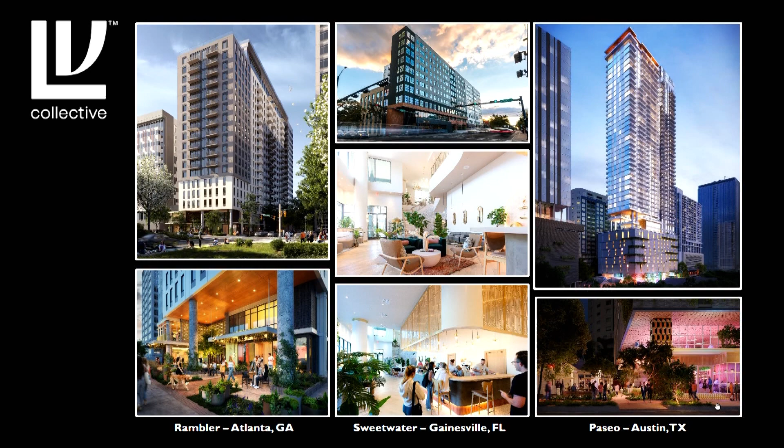Again, some more pictures of the type of architecture we do and type of structure, just to give you a sense of what LV has done in terms of design.

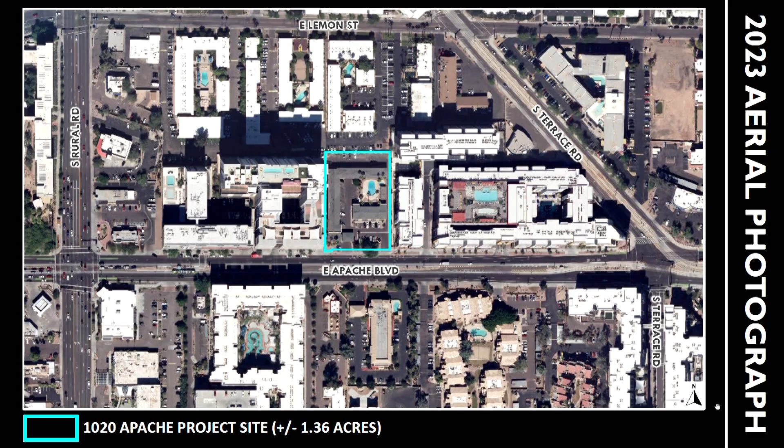The site itself, everybody knows, is on the north side of Apache, it's 1020. It's between two student housing developments already - one used to be called the Rise, now Carbon, and the other is the Apollo. Currently it's a Super 8 motel, as you'll see here, with surrounding uses.

Our request is to do a zoning map amendment to rezone from commercial shopping and service CSS and TOD to MU4 TOD, which matches the adjacent areas around Apache, to do a PAD to establish site-specific development standards, and then design review for the building site.

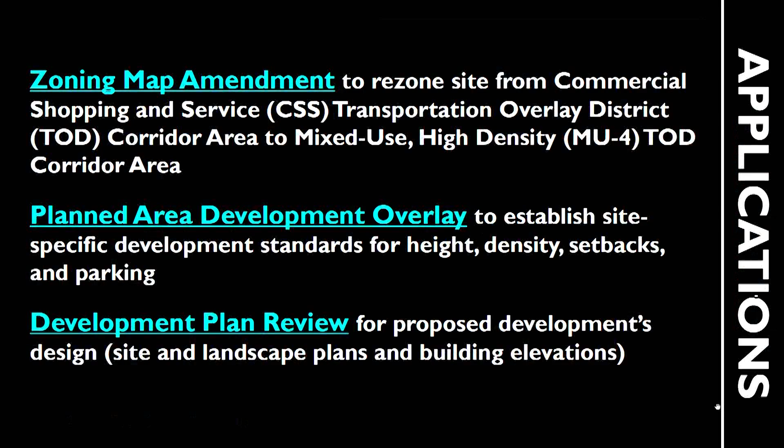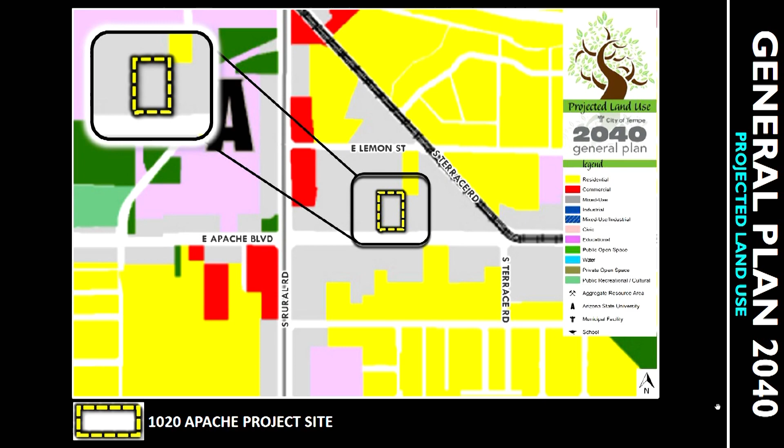So what you see is the current zoning map at CSS. You can do MU4 PAD, which is very similar to the adjacent properties. The general plan designates it as M, mixed use.

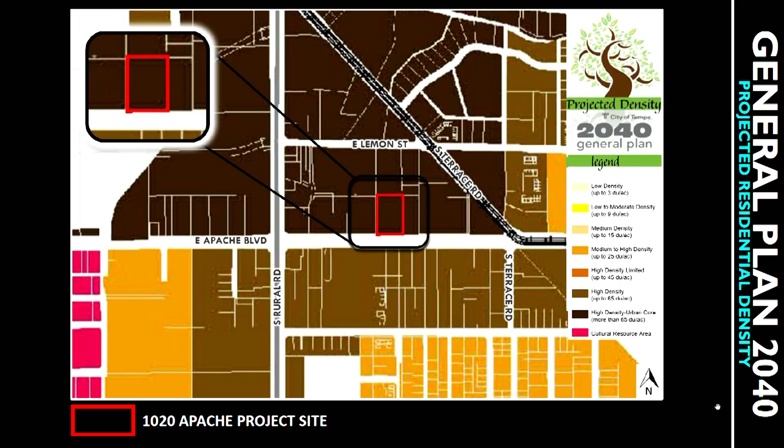So just to talk a little bit about the building, it's a 15-story building. As you can see, the Rise next to the Carbon next to it is about 14, 15 stories. We have 289 purpose-built student housing units: 36 studios, 36 one-bedrooms, 47 twos, 17 threes, and 153 fours.

We have a little more than 2,100 square feet of flex restaurant retail space at the street level, which we can talk a little bit about. We also have a 6,800 square foot lobby.

We have a lot of amenities, as you've seen in some of these buildings - co-work, club room, yoga studios, all internal. We have a parking garage with EV charging stations, EV spaces, compact spaces, and on-street parking spaces.

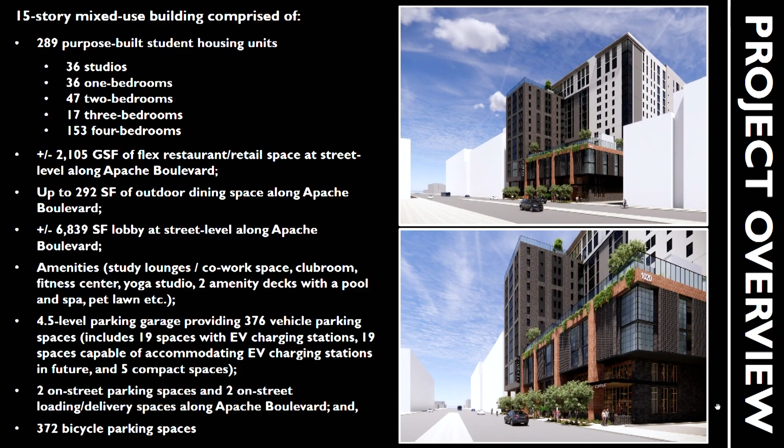We've spent a lot of time - we really want to thank Diana and Ryan for all their help, since it's a thin site. It's thin and long, so in terms of what's happening on Apache, making sure we work with our adjacent neighbors, and the drop-offs - for those of you who've driven on Apache, there's a lot going on there, especially here. So we made sure we're cognizant of the pedestrian experience as well as the vehicular experience.

I'm going to have Allison talk a little bit more about this in a second, but I want to go through a couple of things. One thing we really spent a lot of time on, both on the staff level and from our end, is the landscaping, the adjacent landscaping around it, and I want to show you a little bit about the landscaping and the shading on Apache to make sure - let me.

You want me to stop? Good, I can stop, Jason.

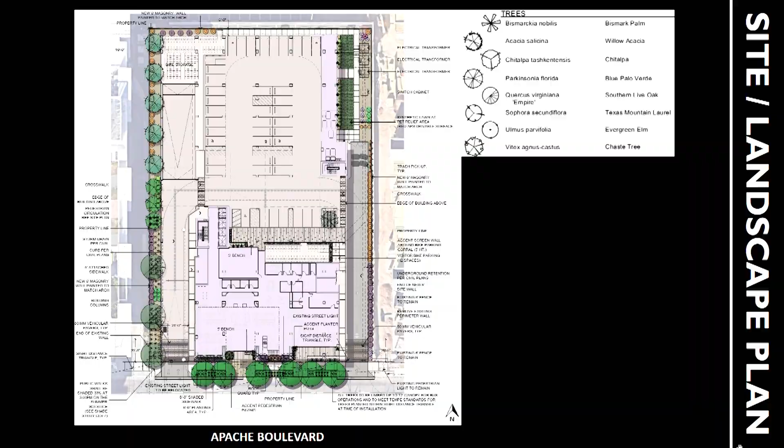Okay, so just to make sure we've got the trees and shading we were trying to get to on Apache, we'll talk about this in a second. I just want to go through a couple designs and show you something. We spent a lot of time, I've talked to both Phil Amorosi and Matt, we've been to CVAC a couple times, and had a neighborhood meeting.

What you'll see in this design, and I'll have Allison talk more about it, is that we tried to make sure we're respectful of our neighbors. Our height on the west side is adjacent to the rise, similar in height. Then we've stepped down and opened it so our east side height along Apache is similar to what's on our east side. We worked through making sure we manage both of our neighbors, so you don't see just one big block on Apache, but a lot of openness and articulation and compatibility with our neighbors.

You can kind of see this here, and I'll have Allison talk a little more about it. And then, I think you've seen our material boards, in terms of the type of quality materials to make sure this is a very high quality, both high-end residential and hospitality looking building.

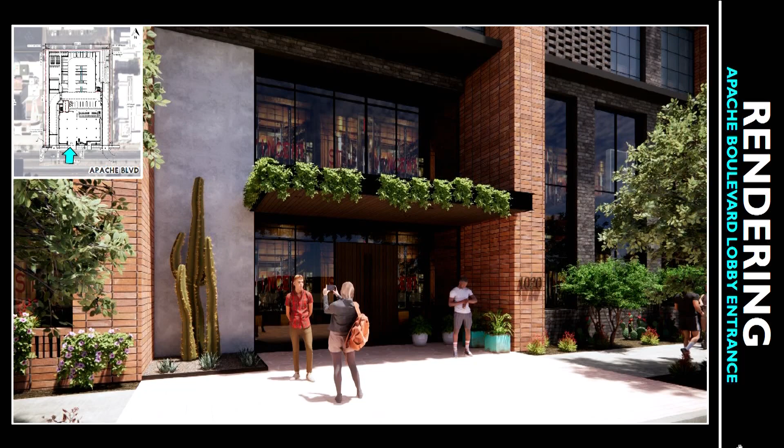You can see the open coffee store, very similar to the buildings we'd shown you earlier. Allison's going to talk more about this, in terms of landscaping, what we're trying to project on Apache. You can also see that Diana and Ryan were very open about making sure we had the right type of materials on the ground level that looked good and would withstand the test of time.

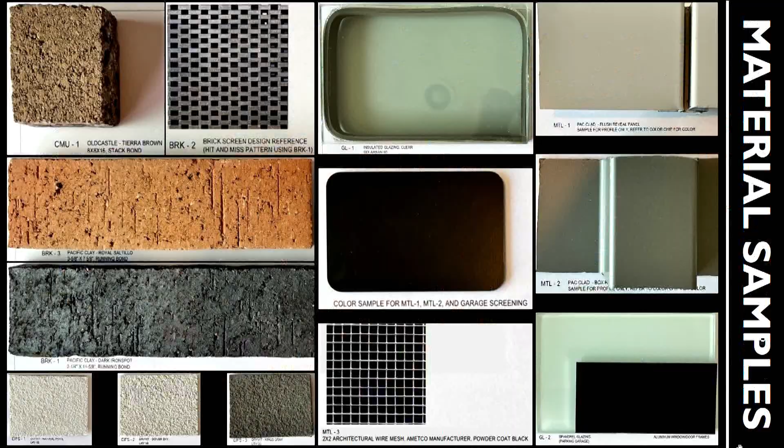And I wanted to talk about this. We talked to Phil and Matt a lot about conversion plans, I think that was part of the deal. From the CVAC side, they wanted to make sure that if this became something else, it could be a residential unit, it doesn't always have to be student housing. What does that conversion plan look like?

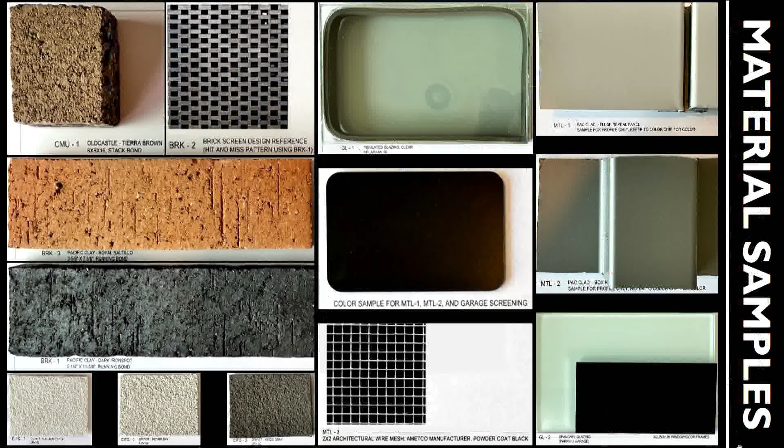So we did a couple of studies on how you convert a 4-bedroom unit to a 2-bedroom unit, and talked about how you manage the balcony, so we could do that in the future. Just thinking through future-proofing the building and what else it could be. I'll have Allison come down and talk a little about the design and layout, and then we're happy to answer any questions.

Thank you, Mandela, and good evening. I'm Allison Rainey with Shepley Bulfinch, principal and architect. Mandela did a great job giving you an overview of what to expect with this project, but we'll just take a quick look here.

As noted, we have an infill site. It's pretty narrow, so we've taken a look at how to organize the program on the site here. Towards the street is all of the public functions, the very visible and accessible active spaces. As you move further into the site, you get more private spaces, the parking, the building service, and access points. Diving in closer on the ground floor level, you can see how the program is better organized here.

You see the on-street parking, the loading right off of Apache. Then we have that sidewalk activated by the outdoor dining for the proposed cafe use. The lobby and leasing spaces are also accessed off of the sidewalk and both from the back parking. And as you move further north into the building, you see the parking, the secured parking, bicycle parking, all the utilities.

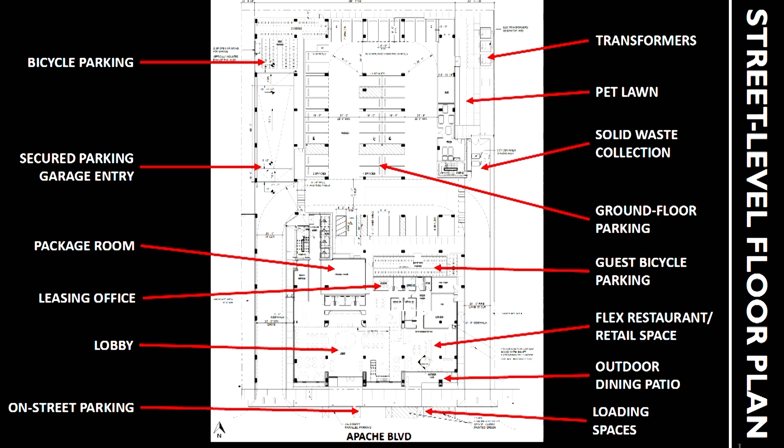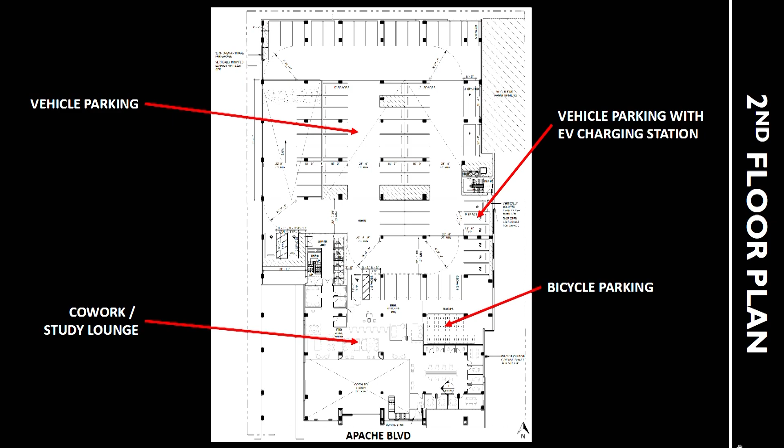Looking at the second level, the co-working space was mentioned. We have a 2-story, basically, lobby area where the co-working space is located on the second floor and overlooks into that lobby space below. So you have a lot of activity that's visible from Apache Boulevard, with parking tucked and hidden behind this programmable and active space.

There are 2 main amenity exterior decks in this project, level 5 and level 14. This is level 5, and there's a pool with larger seating areas, some shaded landscaping, planted areas oriented towards Apache, and then smaller, more intimate gathering and seating areas within the courtyard.

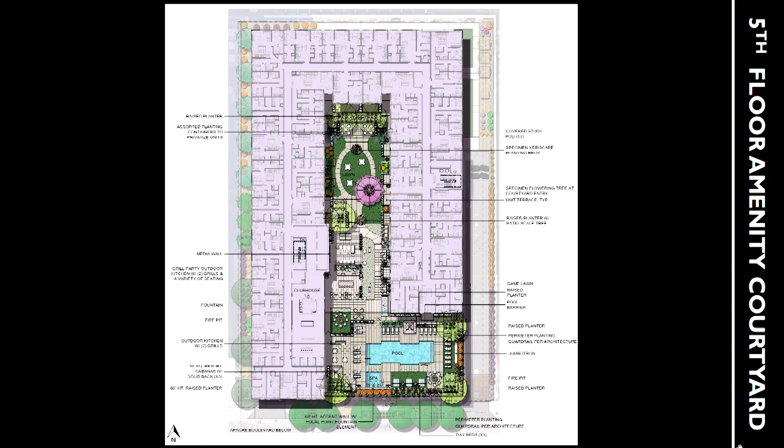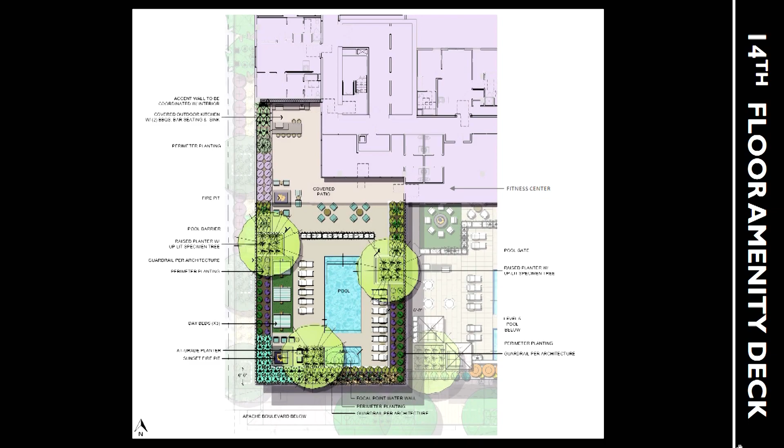Up here on level 14, we're taking advantage of the views this pool deck will be afforded all around the different mountain ranges. This pool deck is also connected to additional amenity spaces on the interior, including the wellness program, the two-story fitness center, yoga, the club room, and group studies.

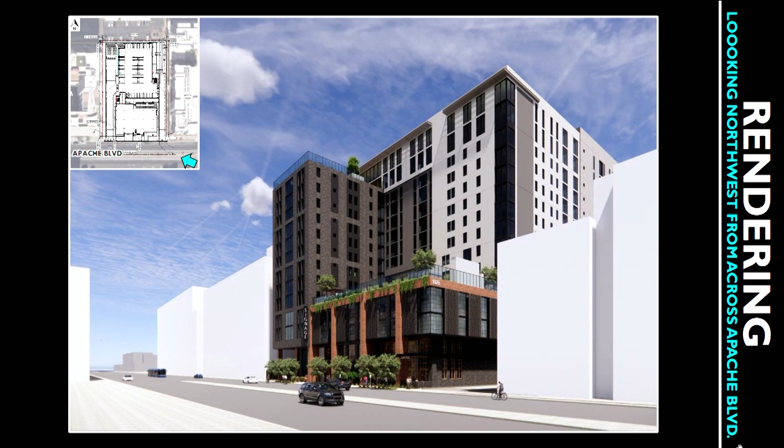Looking at that streetscape a little bit, here you start to see some of the materials we're using. We're activating the ground plane with the coffee shop open to the public in the lobby, and you get a sense of the materials we'd be including in the design.

A closer look at the entrance to the main lobby, the residential entrance, and the entrance to the leasing space. You get a sense of the tactile nature and high-touch quality materials used at the pedestrian areas, with integrated lighting and integrated planting to make it a welcoming environment.

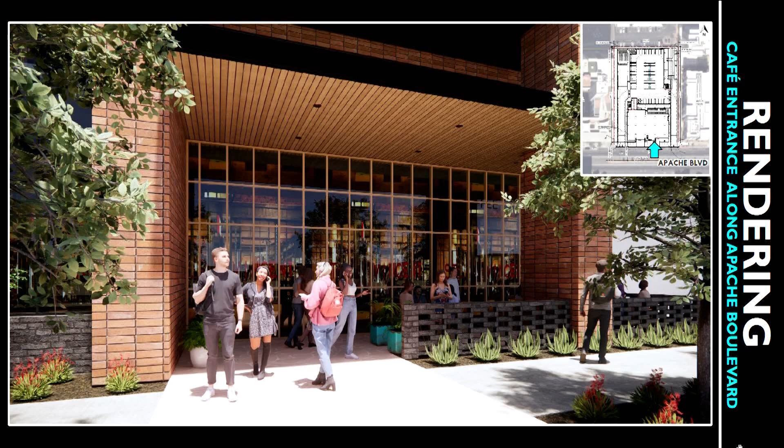This is a distinct entry into the cafe, with different qualities of spaces that you're entering here. There are warm materials, and the outdoor dining is open to the sidewalk, yet it has a defined perimeter.

Looking from the other corner where we have the vehicular access to the project, we paid a lot of attention to understanding the traffic flows of pedestrians, bicycles, and vehicles, and worked to move the columns back into the space more to allow for more visibility and promote safety.

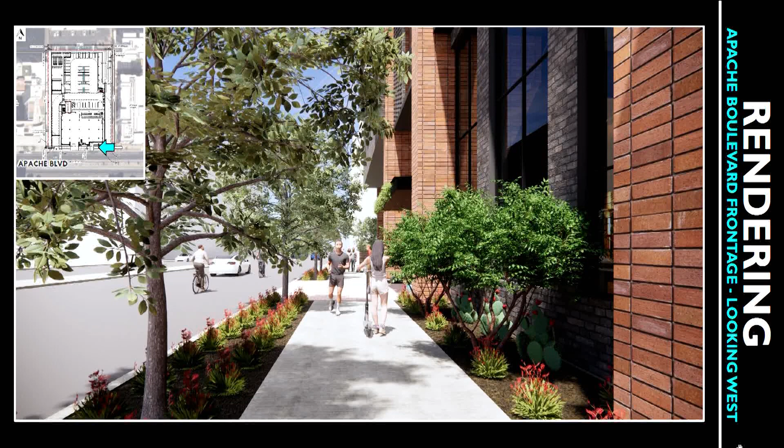The view of the sidewalk where we're taking advantage of both sides, planting on both sides of the sidewalk as possible on the street side.

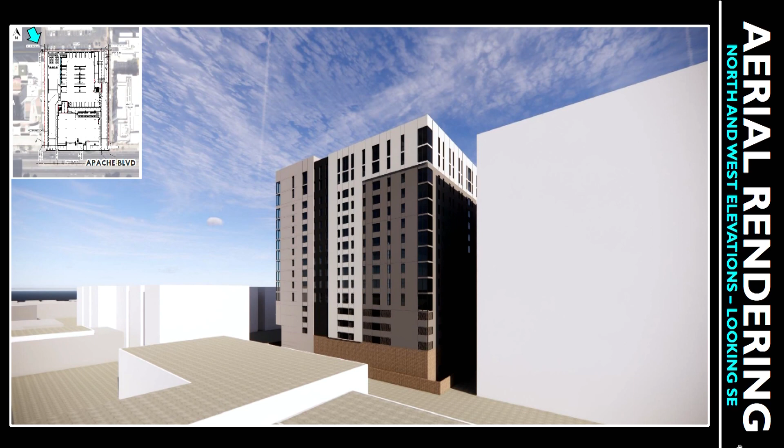From the north view, we're breaking down larger elevations with a change of plane, change of materials, and wrapping the corners, and that's also taken around to the west side as well.

Our material palette is composed of pretty durable, desert-appropriate materials. We have two different kinds of brick that we're working with in terms of how it lays out on the building, some metal and glass, and some nice, warm colors.

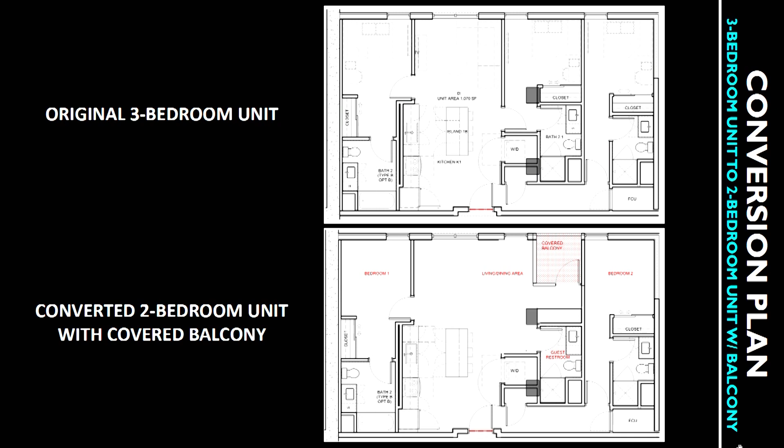Manjula mentioned we were working on the floor plans to understand how they could be converted to some other use in the future, should that be a need. The strategy of laying units out consists of putting the plumbing, services, and all of those towards the interior building corridor, providing more flexibility with what you can do at the exterior.

In this case, we're suggesting that a 3-bedroom unit could be converted into a 2-bedroom unit with a larger primary room, but still have some exterior, private exterior space by carving balconies out of the facade.

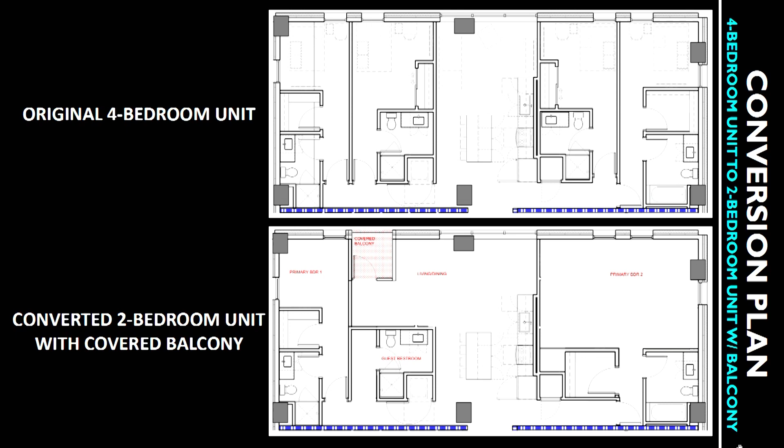Another look at a different unit, again a 4-bedroom unit type, but how we could break it down into 2 bedrooms if needed. This is consistent with being flexible and also thoughtful about how the services are planned in the building.

Manjula also mentioned some of these sustainability features: integrating EV parking, drought-tolerant landscaping, low energy appliances, and lots of multimodal opportunities. The team is also considering Fitwel certification and integration of solar technologies.

That's the end of what I have to present.

With that, we're happy to take any questions. Any questions?

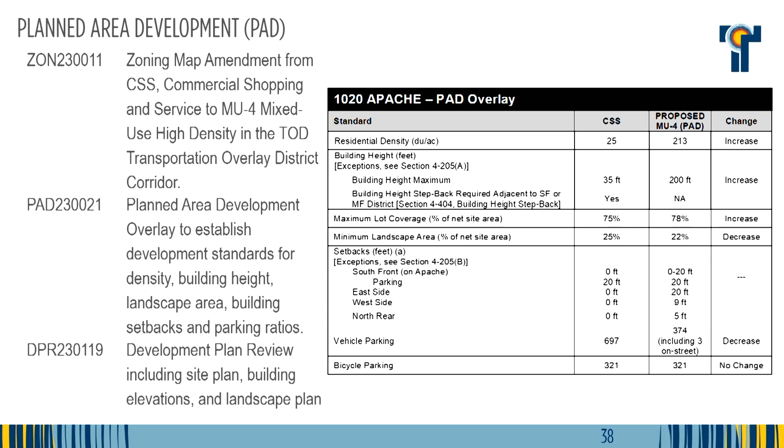One of the unique things about the site, because it is so narrow, is the egress on the east side, which is primarily designed for fire service delivery trucks coming in on that side. The main egress for customer service and residents would be the west drive, so it's a wider drive. In doing that, we were able to narrow the eastern drive and protect pedestrians a little bit from having too much movement both directions across the sidewalks.

They are providing a little bit of a landscape buffer to the property to the east. All of their refuse services are toward the north end of that eastern side.

One of the things that changed in their last iteration of the design was the landscaping along the north side disappeared for a sidewalk. In consulting the other divisions, we determined it was not a direction from anybody in staff, and it's not something that we desire.

But that does provide a little bit of a landscape buffer to the residents to the north and softens the edge of the building on the upper floors, while still having a secured backyard area.

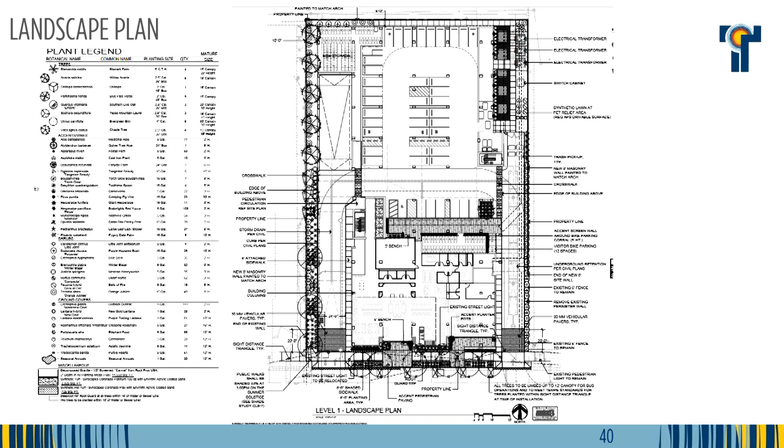This is their proposed landscape plan. They went over, with much prettier graphics, the color renderings of the landscape on the amenity areas.

We had asked for a little more color and material variation on the upper floors, and we did get some of that, but not as much as we had expected. So some of the special conditions I'll go over at the end of the presentation are to address some of those final details we'd like to see worked out before they get to CDs.

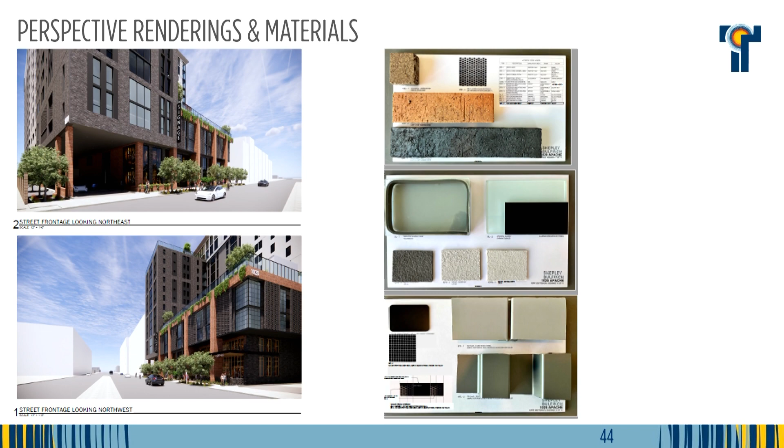Overall, the combination of materials that they've shown—they did give a lot of detail along the street front. We wanted to make sure that we had that four-sided architecture on all sides of the building.

There was a neighborhood meeting that I attended at the Moxy. We did have a few residents that provided some great feedback to the applicants, and they took some of those comments into consideration in their further iterations of the design.

As of 5 o'clock today, we've had no calls or inquiries of concern or questions on the project.

So staff is recommending approval of the project subject to conditions. The applicant has reviewed and agreed to the stipulations presented in the report.

These are the unique conditions that I have listed here. They need to provide a 55-foot right-of-way along Apache.

That was something that was just missed in their final set of plans, but that was something they were noticed on from the beginning, so they are going to be doing that.

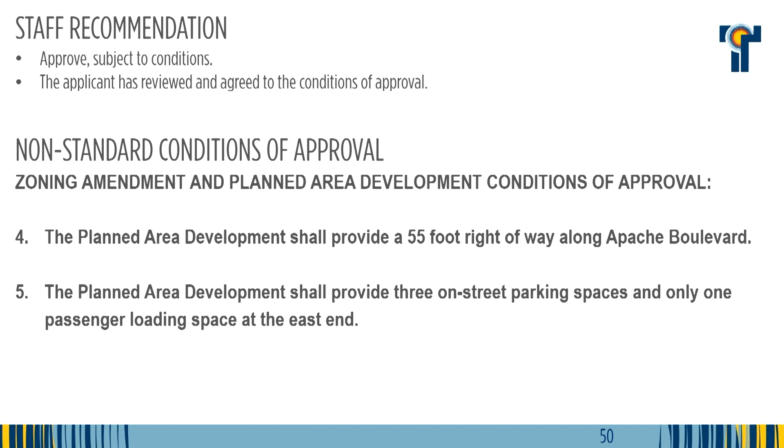There was also a change on the parking. We had agreed to one passenger loading spot on street for Uber/Lyft type pickups and drop-offs, but not truck deliveries to the commercial space. Restaurant deliveries and all other deliveries need to be done on site. So we're wanting that to be only one parking spot for passenger loading and unloading, plus the addition of 3 on-street parking spaces. There's a condition related to that.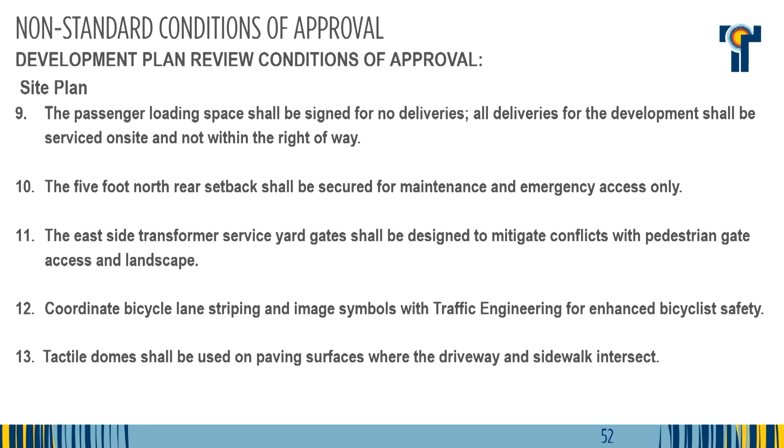Traffic engineering asked for some enhancements on the street front for striping for bicycle lanes and tactile domes at the sidewalk for the driveway entrances.

On the elevations, this is specific to the materials. Number 32 is related to signage and pedestrian notification. Number 33 is related to the ground floor on the north elevation, wanting more transparency from that back area into the garage, but still having it be secure.

This was something the police department asked for, so that if they were in the garage, they could see to that back area where the parking terminates at the north end of the garage into that 5-foot yard to the north. So this is a specific condition that they requested.

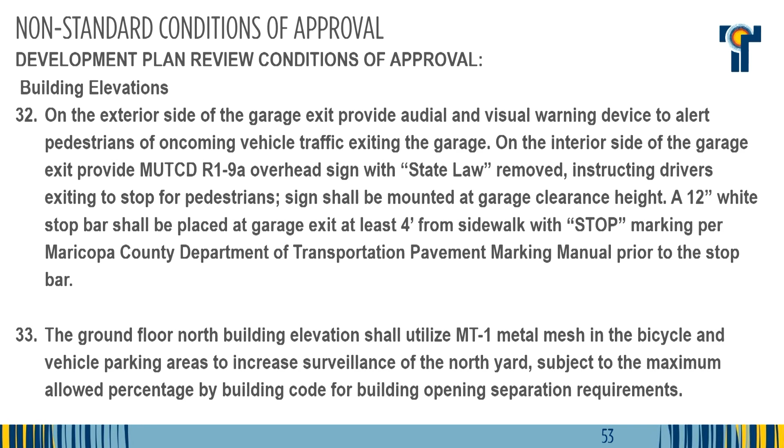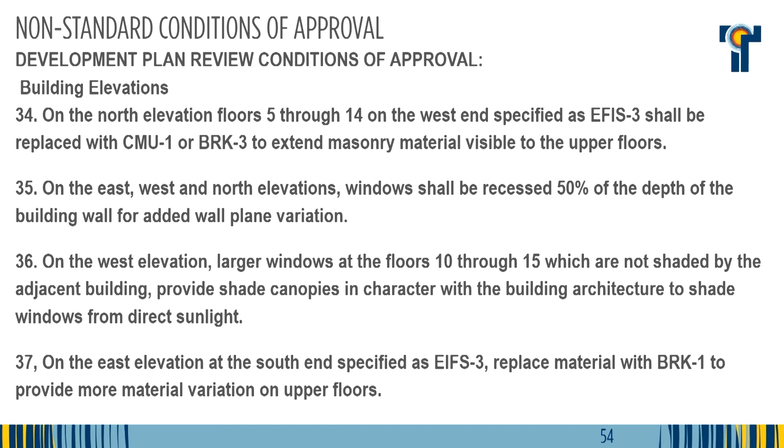And then the elevations on the upper floors, floors 5 through 14, were to provide some additional materials and colors to give more four-sided architecture, with these conditions through 37 or so, as well as 38 related to floors 6 through 15, and the landscape on the north side specific to trees and no shrubs on that north side.

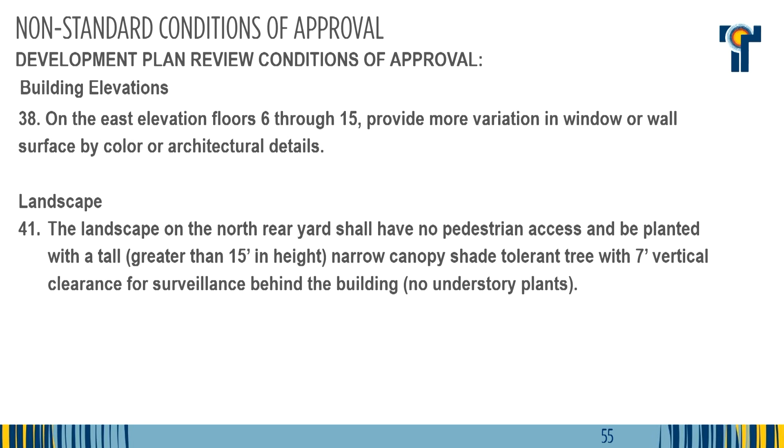And I'll be happy to answer any questions you might have.

Any questions? Commissioner Miller? So can we go back to looking at the non-standard conditions of approval? Go back to number 6, please. Let's start there. I know this is becoming sort of a standard thing, and it's just a burr that's under my saddle all the time, but that's okay.

You're requiring that they hire a qualified archaeological firm to complete a monitoring and discovery plan, testing, and monitoring ground disturbance. Okay.

What happens with whatever report or anything they produce? This gets reviewed by our historic preservation officer. It needs to be signed off on, and anything that occurs through that process, they're in communication with our staff.

I'd like to see that included in there, because otherwise it looks like you hired them, great, they did it. I guess what I'm looking for is something very specific in terms of this is what we're going to do with this, and this is what happens to it, not just that they did it.

Okay, I can work with management, I think, to address that.

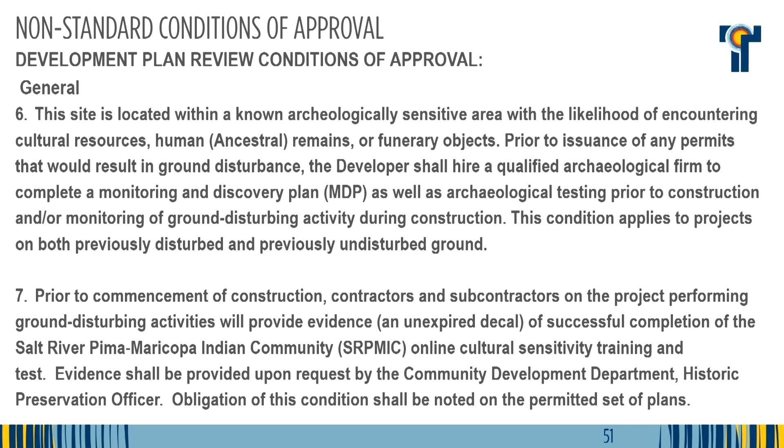No, evidence of completion shall be submitted to the city. The last part says the obligation of this condition shall be noted on the permitted set of plans. I see that, but I also think it says 'upon request.' Are you going to request it?

What typically has been happening is when they go in for their plan review, the team reviewing the plan set makes note of that, and then contacts the historic preservation officer to see if they've received the evidence. So we have communication. That typically happens, as you just said. Again, this is one of those best-of-intents situations. If you don't specify it, there's no guarantee it happens.

So they should outline that procedure. It says they will provide evidence, but it says evidence shall be provided upon request. So rather than upon request, it shall be provided to us. Just taking out the words 'upon request.' So we don't have to request it, they just need to do it already. I think that makes sense. Thank you.

Were there other conditions that you wanted to look at? Sure, let's go on. Backwards or forward? No, you can go forward.

The north elevation that you're concerned about, with regard to especially the upper stories, where the coloring is not very unique or doesn't provide a great deal of interest, it's pretty flat. Are they going to fix that? Is the intent that you want them to fix it? Yes, staff did communicate with the applicant a couple of times on what we were hoping to see, and we just didn't get that far in the last iteration they submitted before the hearing.

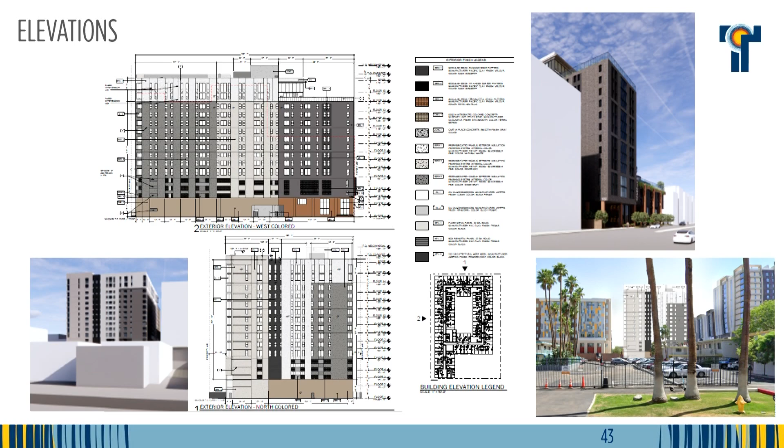The east side, we felt needed a little more work because of the height of the building on the east side. There's more exposure. So if you look at this image on the top, I think there was a line shown here. It's hard to see the dashed line.

Let's see if I can use the pointer. You see where the color along the left side of the drawing kind of ends? Yes, and there's the stripe, right there. Go a little to the right, and then up slightly, down one. Okay, there's a dashed line that represents the building to the east. So everything above that dashed line is what would be visible, and that's where we wanted to have more color and material on the upper floors.

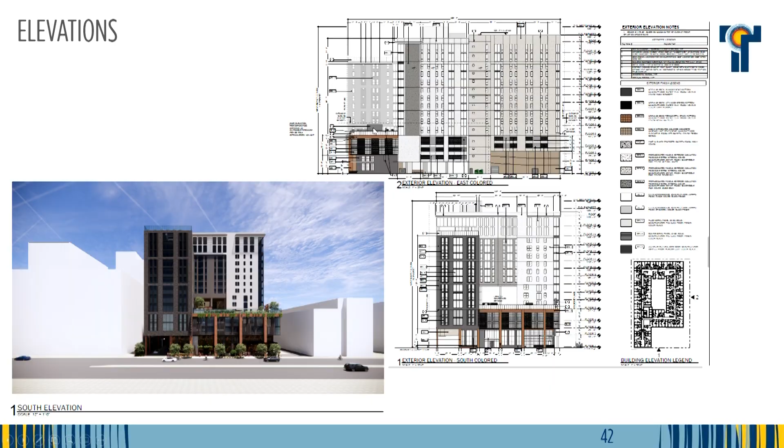I think adding additional material would make it a lot better, because from that side you lose all the interest on the brick in the front. If there would be a way for them to extend that up, perhaps—that's the condition we had.

You added that one. On the west side, number 35 was about the depth of the windows to provide a little more variation in the surface plane. And then number 37 was related to the EIFS and the addition of brick on the upper floors.

About how much of that window recess will you actually see? How deep are they going to be? So if it's a wall width of, say, 6 inches, you'd get about a 3-inch depth. That provides a little more shading on the windows, and more play in the surface, a textural play, similar to the brick pattern in the front elevation, so that it's not perfectly flat. That would be a nice solution for that.

Now let me ask one other question. I'm sorry, I was the one who wanted to talk about this.

Please continue. Parking - they have 4.5 floors of parking? Is that how I'm reading that? Let me see, I thought it was 3. We have surface parking on level 1, then level 2, level 3, and up to 4.5 with parking. It's all wrapped, so there's some screening on the elevations - a combination of the brick pattern and some metal grid pattern for ventilation within the garage, which creates kind of a window pattern.

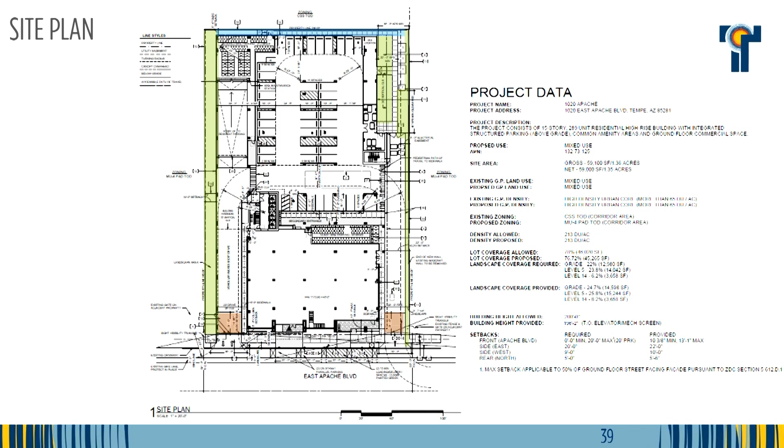Does that change the footprint or anything related to the design of the front of that building? No, it's kind of an unusual situation on this particular lot. If you look at the floor plan, in the lower left corner, right by where the arrow is for the exit, that little dashed line that pops out towards the street, there's just one section of their street frontage that's not 55. We had a note that they needed to dedicate that 55-foot right-of-way, and the note was not picked up when they made their revisions. So they're aware of it. It doesn't affect the footprint of the building or any of their design. It's a dashed line that didn't get moved, so we wanted to make sure it was codified by a condition. Okay, that makes sense. Thank you.

All right, I appreciate the presentation. Thank you. Okay, now we will open it up for public citizen input or comments. Was there anyone from the public wishing to speak on this project?

Seeing none, does the applicant wish to have any additional responses? There was no public comment. Mr. Chair and members of the commission, I appreciate your time.

As Diana said, we agree with all the commission's conditions. She's been very thorough during this process, so we appreciate her help. Some things not getting picked up happened because of the holidays - plans have to get back about 6 weeks ahead of time, and with Christmas and vacation. We apologize for that, and appreciate Diana's commitment to making the conditions work. We agree with everything she's done, so we appreciate your time.

Thank you. Can I ask a question? Commissioner Miller asks: the two conditions, 6 and 7, that were to be modified, are you good with those? Yes, I'm fine with those, Commissioner Miller. We've already spoken with Logan Simpson, so we're moving forward. No problem. Okay, thank you.